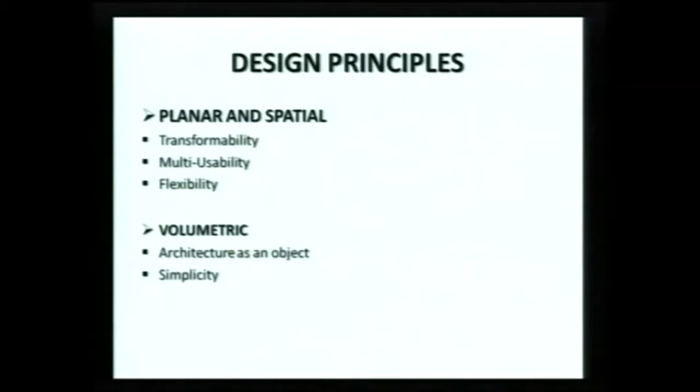Public scale, architecture, and interior. On planning level: transformability of space, flexibility and multiple usability of spaces, and volumetrically how we deal with our architecture is how we envision it as rather an object rather than something utilitarian. So utility comes in the planning and interior designing of the project, while volumetrically we prefer architecture to be as an object.

Starting with the competitions, we have been doing some competitions lately. First ever competition we did was for IAP House, in which we had our winning entry number 3.

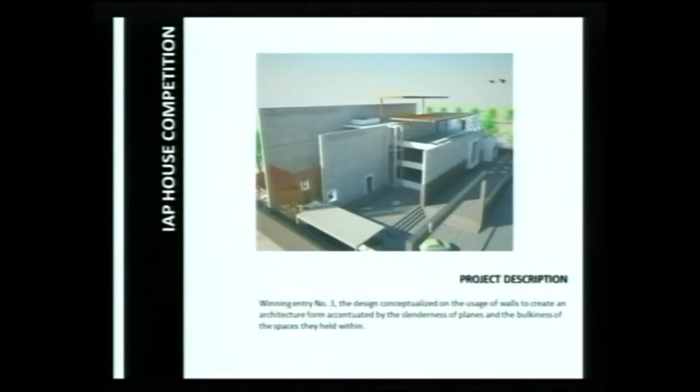The design we conceptualized on the usage of walls to create architecture which was much more slender because of the surroundings. The context was quite narrow, so walls were used to form slender planes, and they held within themselves courtyards and spaces which were quite hefty.

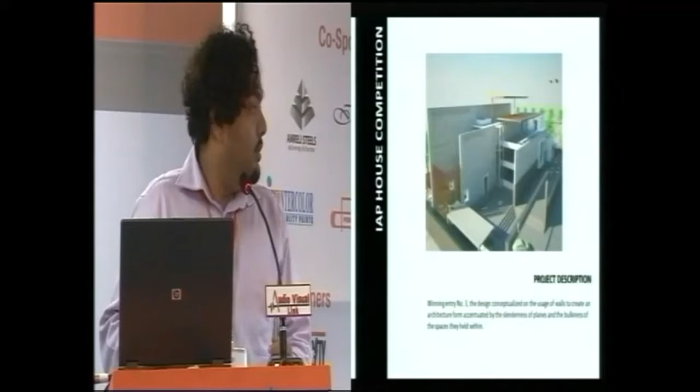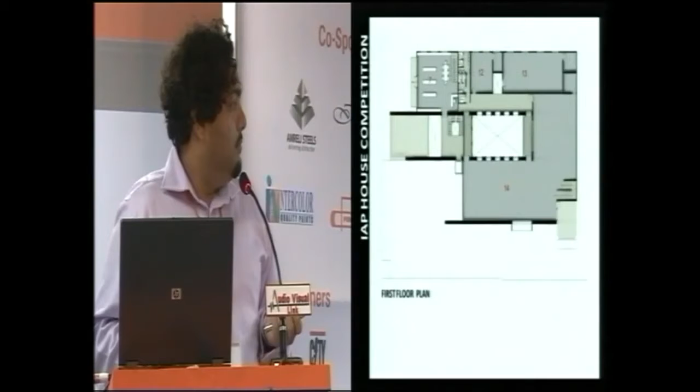This is the plan. These are the walls, the 3 walls which made the whole plan. These are some views. This is how the walls were working. These walls were also demarcating all the spaces so that when a person comes, he doesn't fall short of recognizing where he has to go and all.

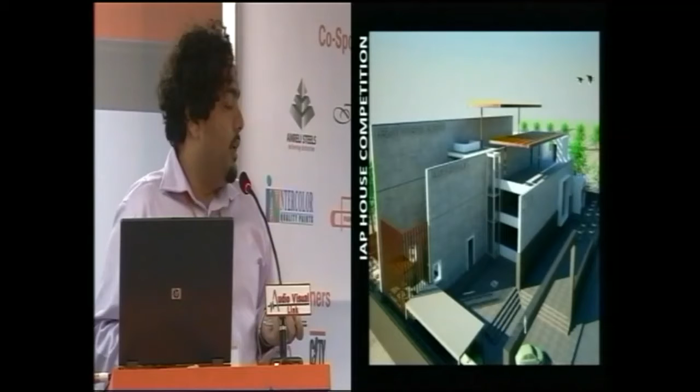This is another project that we did for a competition in Woking, England, and this was supposed to be an extension of a museum, rather a summer pavilion for a museum.

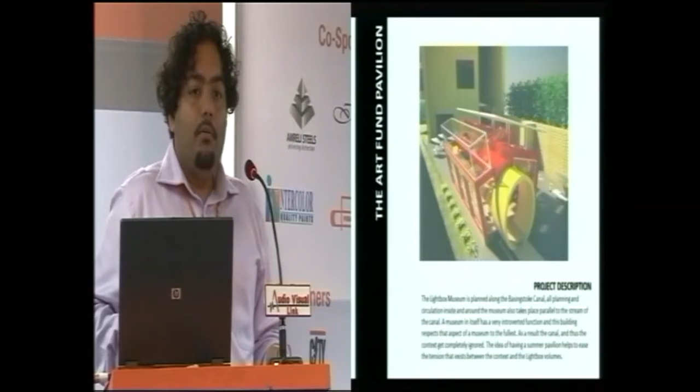And surprisingly, the museum in Woking is planned alongside a canal, Basingstoke Canal, and the planning and circulation inside that museum was all along it, so all the circulation was happening parallel to it. What we did was create this extension in such a way that it was placed parallel, but all the orientation was happening perpendicular to it, so giving more importance to the canal.

When we started conceptualizing, we wanted the predominance of the canal to be there, so we took inspiration in a floating boat's form, and we architecturally conceptualized it.

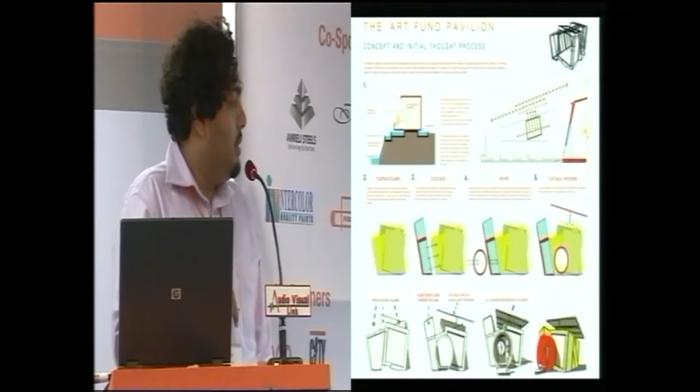We took these 5 elements of a boat: a floating volume, a tilted deck which was looking towards the canal so it didn't get the glare from the canal, an anchor - a circulation space which anchors all these floating volumes - and flat sails and diffusers which would diffuse the light coming inside the museum, the exhibition space.

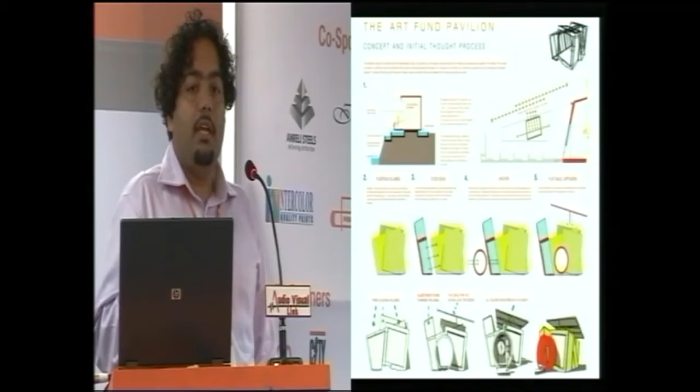This was the plan, how it would work in 4 or 5 layouts. These are some views of this overlooking the canal. So we wanted it to look as if it was part of the canal rather than something which was just looking at it.

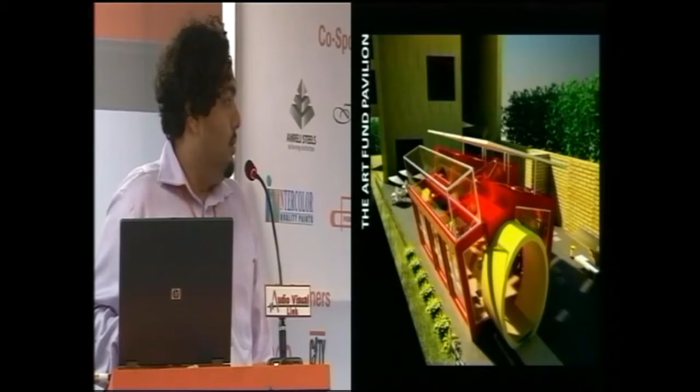This is the interior view, how the diffusers are diffusing the light coming inside. This is another project we did for a competition. This is for Pakistan Navy Central Library.

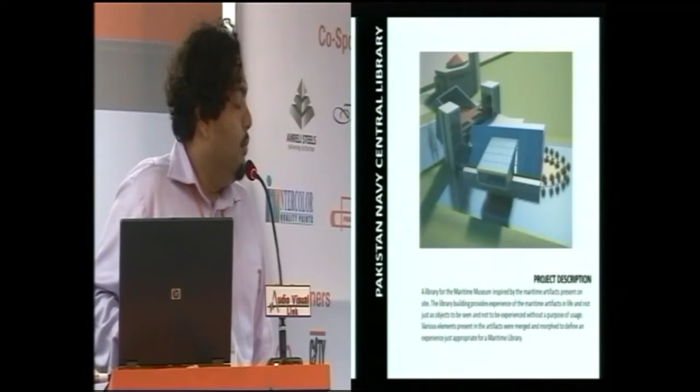It's situated - it was meant to be, it's just a competition, I think nothing materialized after that - but what we had envisioned for this was it's placed inside the Maritime Museum at Karachi.

So the first time we went to the site, we were quite impressed by all the artifacts placed over there. And a library which had to be placed amongst all those artifacts, we wanted it to be part of it. All those artifacts were so interesting, we wanted them to become the library.

So what we did, we morphed all those elements, the artifacts, into one building: the ship, the submarine, the watchtowers - 2 watchtowers - suspended bridges, propeller. The planning was skewed, rotated on it after we set it on the site.

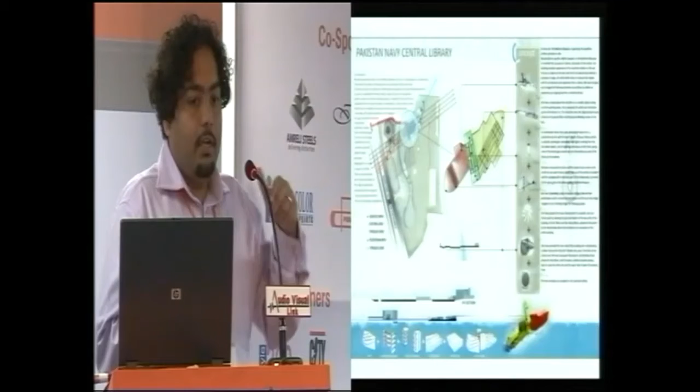There are 2 decks we've used. One is implied - it just heralds the placement of this project, you'll see it later on. The other deck was an extension of the library, an open air library. And the porthole windows - we were quite impressed with porthole windows

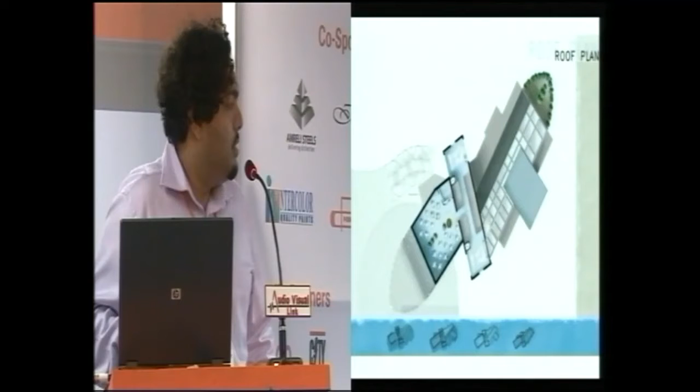on these ships and submarines. These are the plans - this is the ground floor plan, I won't go on explaining it. First floor plan, the rooftop plan - there was a rooftop garden over there. These are some sections and elevations. We were making the construction drawings all along too.

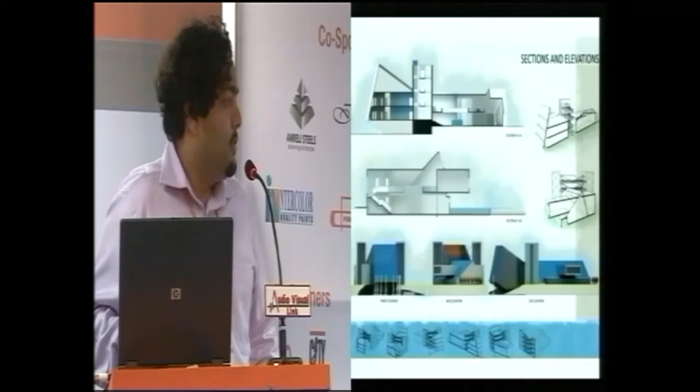These are all 3Ds. This is the deck I'm talking about, the implied deck, you'll see it later on. This is that deck, an extension of the library. There was supposed to be a door over here, so we missed it out.

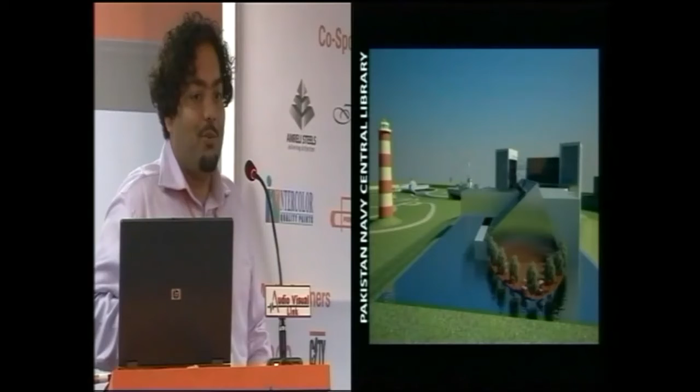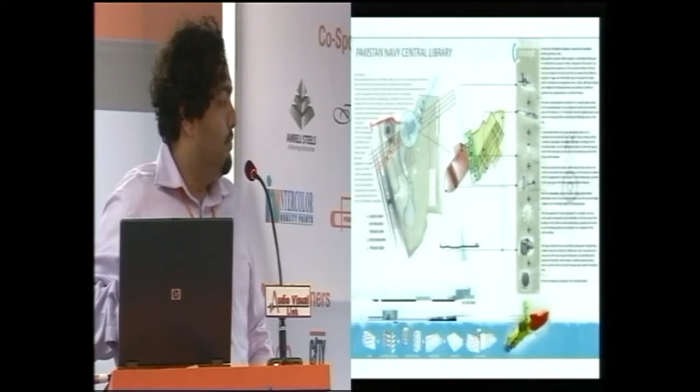This is that part of the submarine. Can I go back and explain it a little bit? This part of the project was supposed to be - this is what we conceptualized the whole exercise with: a collage of a submarine sinking in or moving in, a ship jutting out, and the lighthouse in the middle, anchoring it somehow.

So this is how it comes. This is that submarine part, which goes a little bit inside - it's a little bit submerged, so it's a very silent part of the library. And these are those 2 watchtowers, which form the main circulation. You enter from here, you exit from here. And this is that ship part of the project.

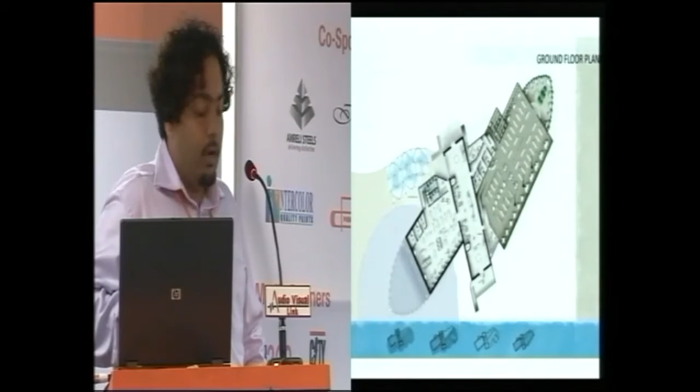This is that ship part jutting out from water. This is the submarine part.

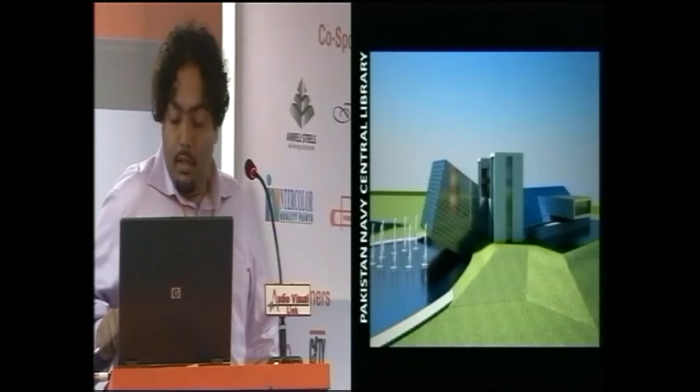These are the suspension bridges on all levels. You come here and you can watch all of the Maritime Museum from here. And these are the 2 watchtowers. There are also some conservatories over here. This is that submarine part, which is a little bit inside the earth. This is that implied deck.

Basically what we wanted to show in this presentation were our renovation projects, because we have been doing many renovations lately, and these are all real projects now from after the competition.

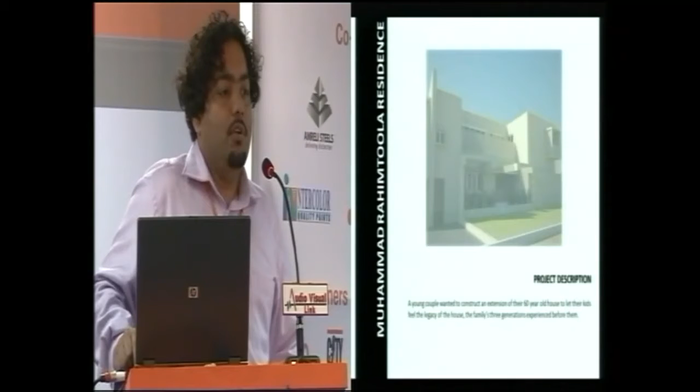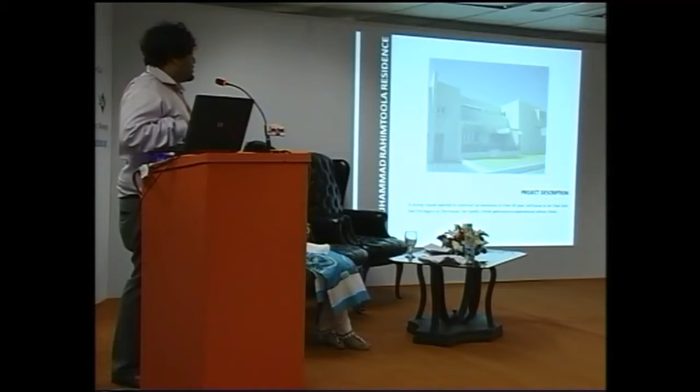This is a house. This was a rather old house, 60 years old, and our young couple clients wanted their kids to live this legacy. 3 generations have lived in this house, and they wanted their kids to also live in it. The parents' family was living on the ground floor, so they wanted an extension on top of this.

So this is how - let me show you the old house first. This is the old house, and this is the 3D that we made.

I'll go back and explain the plan a little bit. This is all addition - there was just a ground floor over here. So we used 2 terrace courts, and we made the lounge in such a way that it opens up into the 2 courts. At night, this whole space becomes one and large. And all the rooms are west open. These have wind catchers on top, so if they're not facing the light or the west side, they

catch wind from here. Now I'll show the final pictures of this house. This is the fire - this is how it looks like. And obviously they wanted this house not to look as if it was made in some other time or age. They wanted it to look as if it was made in the 50s.

So we acted completely - the form of the house before was also quite interesting, so we didn't want to change it much. So it was the least of a designer's intervention, just using the elements already existing. This is all from before - only this part of the house was ground plus one from before. This is what we have added, all of this.

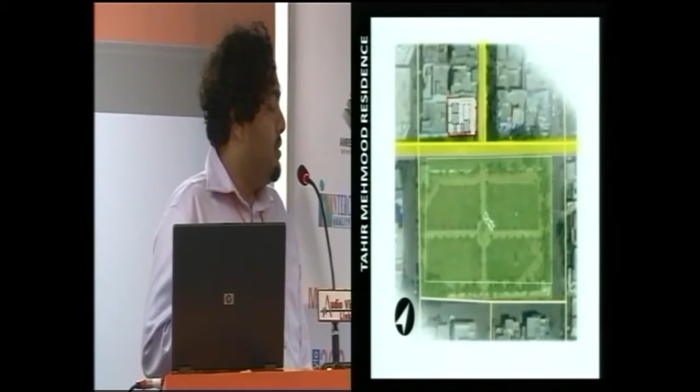Actually, this was the elevation of the house, but some 10 or 15 years back, they put a barrier over here. So this is a corner plot. So this became the major elevation of the house, and the problem was this whole house was planned in such a way that all the toilets and all of these spaces were facing the park, and obviously all the insides of the house weren't.

This was the house 6 months back. This is the plan of the old house that used to exist here. Toilet, kitchen, toilet, a shop, and the problems of this house were many.

It wasn't just that pipes were coming on the main elevation. There was no proper entry. You had to enter directly into the drawing room, and then go inside from all of these spaces. The other entrance was on the side, which would feed all the domestic help. So literally, a lounge wouldn't exist.

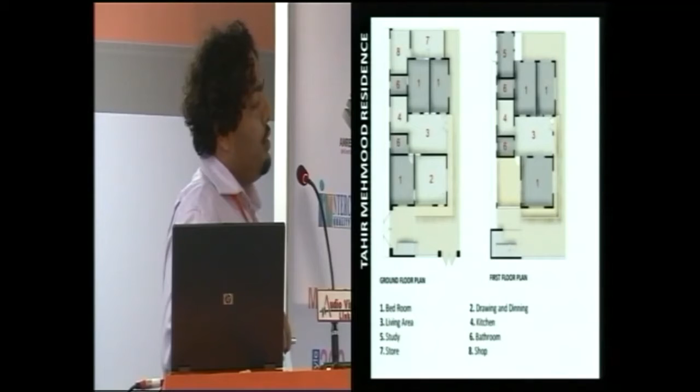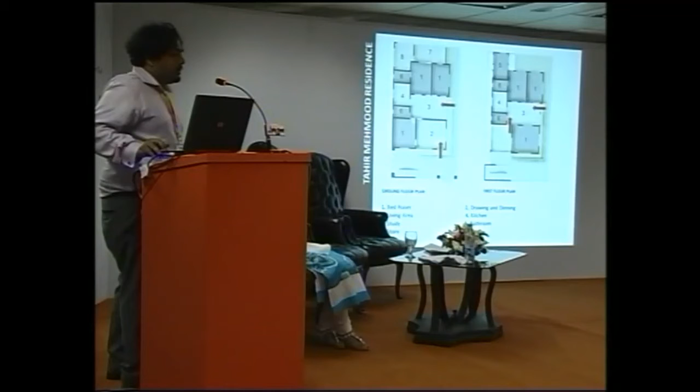On the first floor, also, the only good thing about this house was the terrace which would overlook the park. So we retained it, and apart from that, we have changed almost everything.

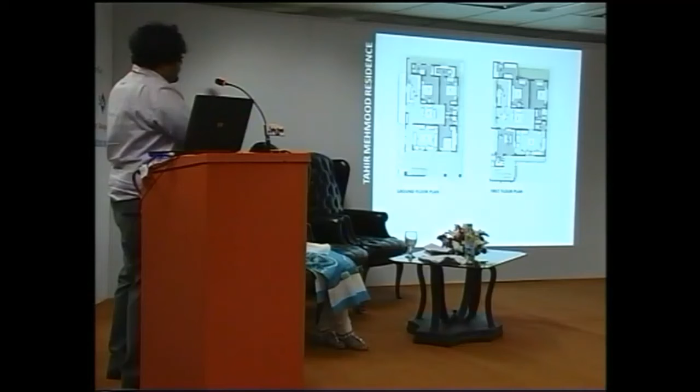So this is what we have come up with. We liberated the elevation from all the pipes. We flipped the whole plan, and we took all the toilets onto the other side, the side which has a common wall with the neighboring house. So in a way, another good thing that happened was that there was just one attached bath in the original plan. Now every room has an attached bath.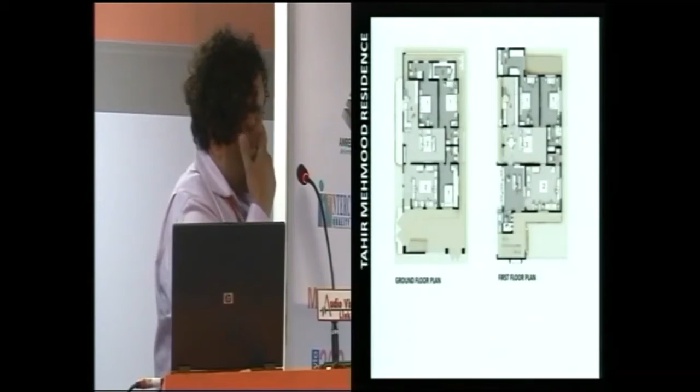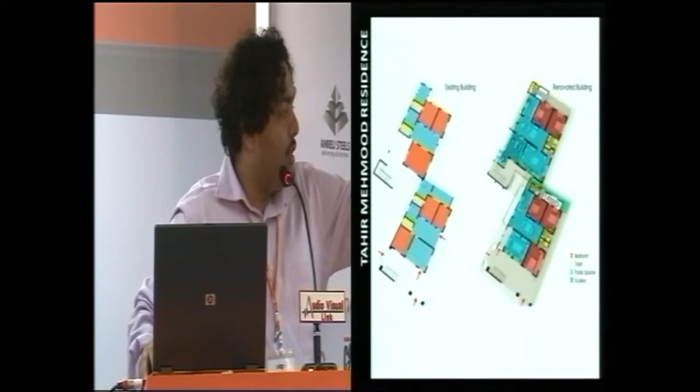There is a separate entrance on the ground floor, and a separate one as well. I think this will explain much. The green on the ground floor, on the right side, the green path shows the service entrance and service circulation.

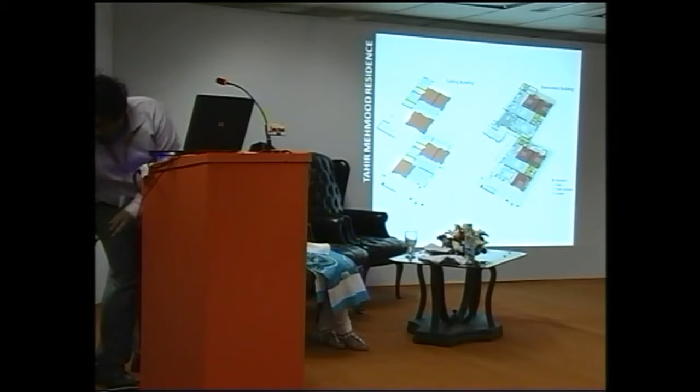So the domestic help comes separately. They don't have anything to do with entering the house and going through the lounge. The toilets we have placed, we have lowered the ceiling so that there is cross ventilation, and lots of light coming inside.

So this is that service circulation from the back of the house. They don't enter through the lounge anymore, like previously they used to come from here. This is a separate entrance, kind of a foyer corridor, and this is the drawing room. This is the kitchen and all, and previously this was the terrace.

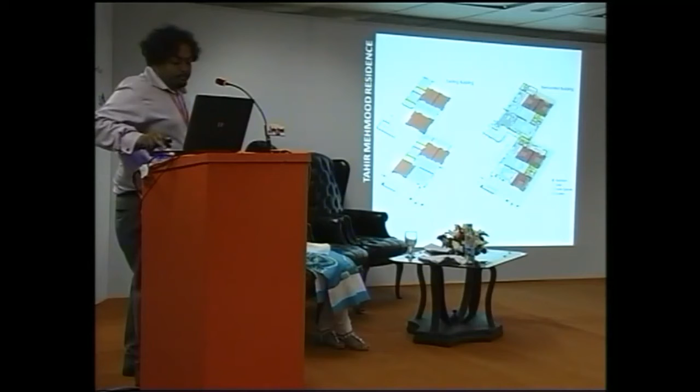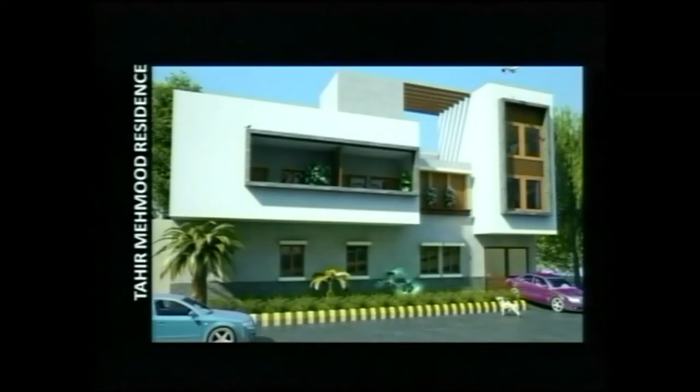What we have done is recessed it a little bit so it focuses on the park, and there's a study also we have created over here. So this was the house before, and we changed it to something like this, and it's almost done. It's just in the final plaster stages.

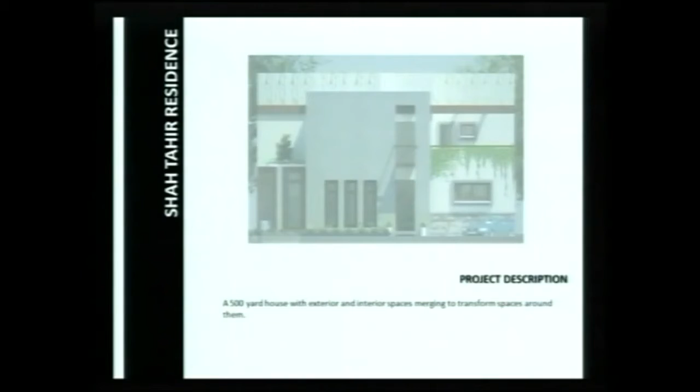These are some of our residential projects currently under construction. This is a 500-yard project, and this also has a series of courts. The transformability of spaces is dealt with in such a way that the compulsory open space at the back is incorporated inside the rooms. So if you open up these doors, you actually unify the space, the exterior and the interior. There is an interior courtyard.

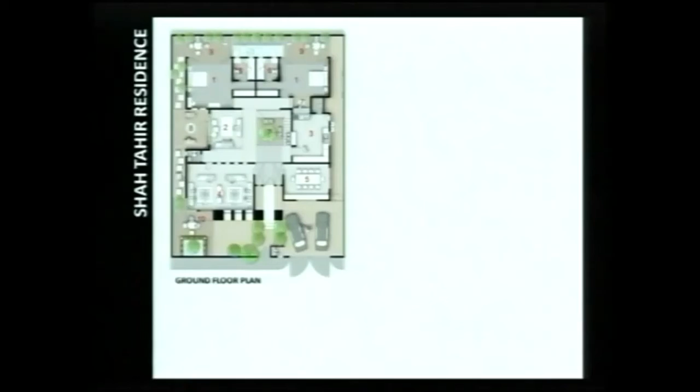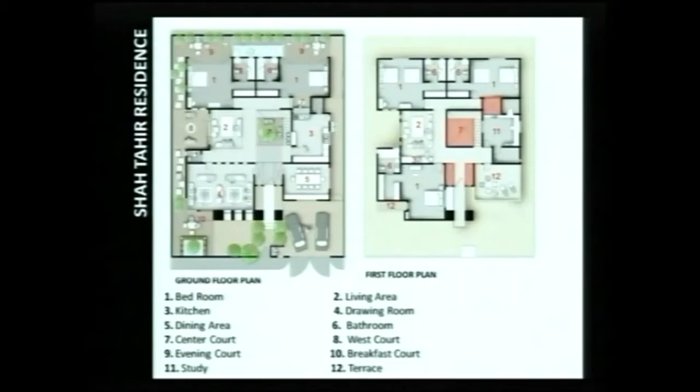Actually, what we were trying to do over here was apply our design principles. The basic three things we discussed: multifunctionality, flexibility, and transformability. We can see that the courtyards are designed so that once the doors are closed, you have a private space, and once it's open, it opens up into a whole new space, incorporating the interior and exterior together. So we wanted to apply all our principles into a house in a collaborative way.

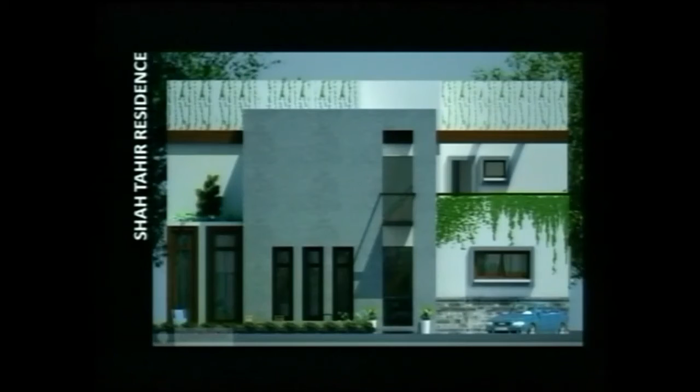Okay, next. These are some of the 3Ds.

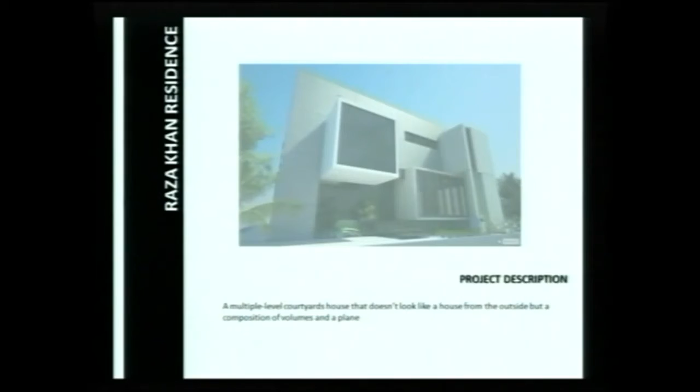This is another of our projects, the 500-yard project, and this is what I was talking about, architecture as an object. Whenever we start a residential project, we start with this in mind that it shouldn't look like a house. But in the end, all the clients come and say, we want a balcony, we want a terrace, and obviously it loses all the thing we wanted with our residential projects, that they shouldn't look like houses.

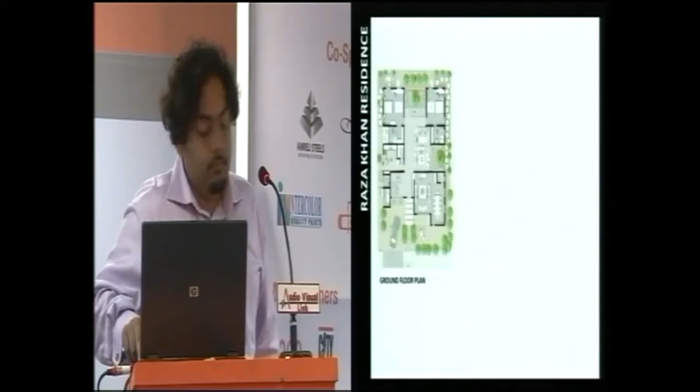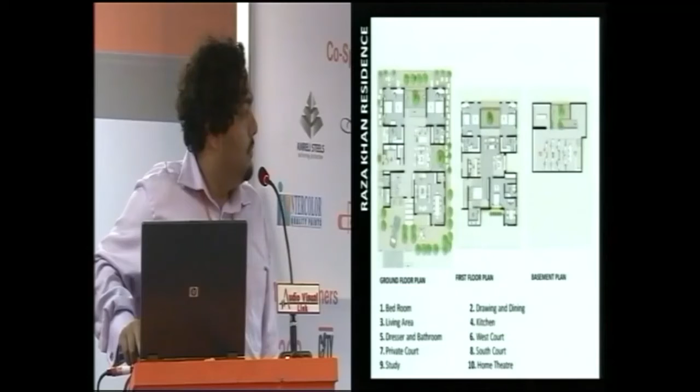This is the courtyard core. So we have it in the basement. I have sections that I'll show. There's a courtyard in the basement, on the ground floor over here, and on top, after a double height space. I'll show it in a section. This is the basement. These are the courts, double heights, atriums.

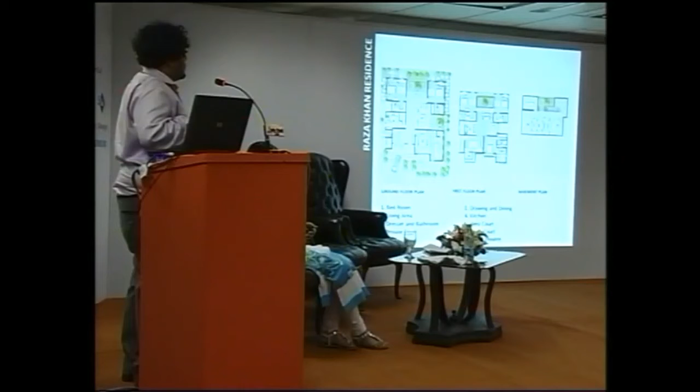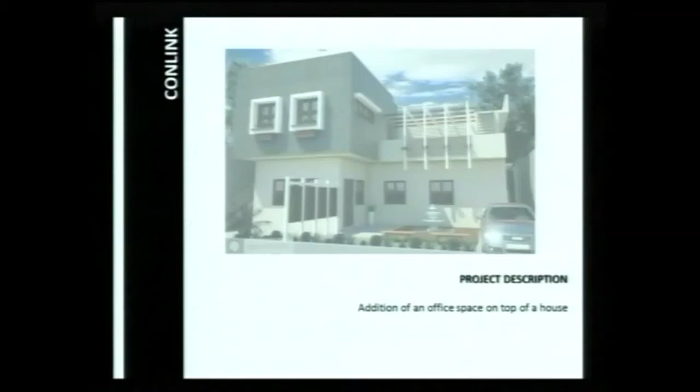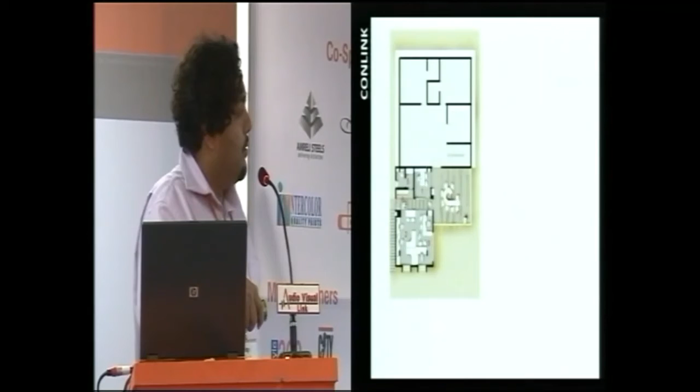These are some last projects. This is a house, with an addition of an office space on top of an existing house. This was supposed to be just... this is what happened. This is the plan of the added space, the office space with a court terrace meeting space.

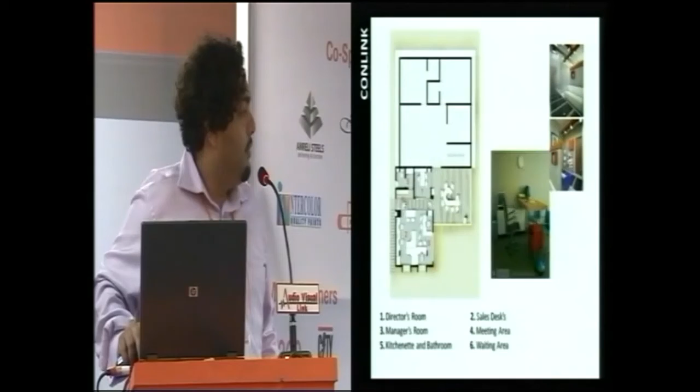This is Conlink's office. They have a stall downstairs also, and the client is sitting here also.

This is, I think, the last project I'm showing. This is a recently completed office, medium budget, very medium budget, for a young fellow, 25 years old, who wanted the office to grow as his business grows. That's why you see it all empty, because only these two office rooms are being used right now. All of this is just partitions. So this was actually just a partition designing job that we did.

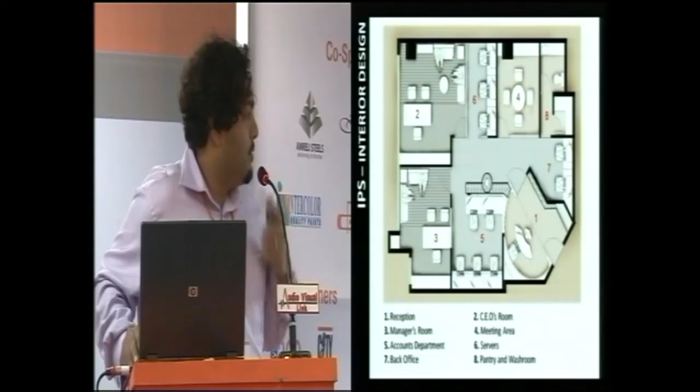And you'll see the photographs of that. These are the 3Ds we gave him. Much before that, he just wanted 2 rooms, but we tempted him with how the office would turn out. Otherwise, they weren't even going for the partitions.

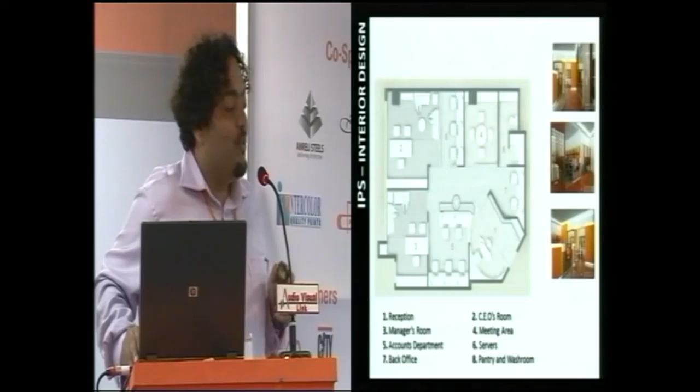And this is what they have come up with. They started moving in today, I think. Furniture design is also done by us.

You say it, she wants to say something. Okay, the next coming up part is the most interesting part, which we love about Sayem. He captures things in such a natural way that we are like, okay, why can't we see it in that way which you see? And that's up next, right after this — his architecture photography.